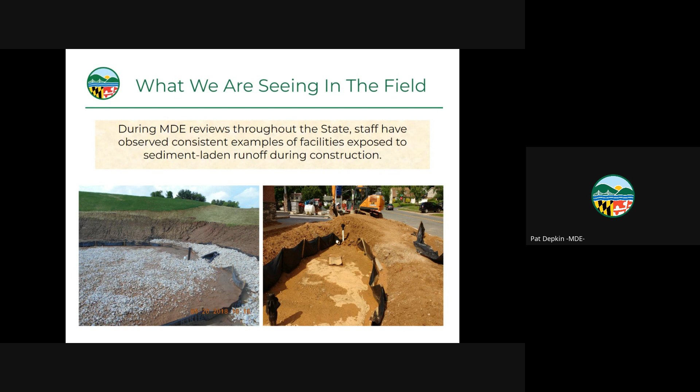So the stormwater manual specifically is pretty clear that when these facilities are installed and the surrounding drainage areas are not 100% stabilized, we need to divert the muddy runoff around them. Next slide. Got a couple more pictures here.

Again, in this case, we don't have silt fence around the perimeter of the BMPs, but we do have filter cloth laying on top. In this case, all the filter media and the underdrains have been installed. It's in there. And yes, granted, there is seed and straw down on the drainage area, but it's not stabilized. One good thunderstorm and these things are going to be inundated. And you can even see in the example closest to us, the filter cloth has all kinds of dirt and soil and whatnot on top of it.

And again, the fines, the clays and the silts that migrate through that filter cloth is going to compromise our facility and potentially compromise the underlying soils that may or may not have an infiltration component or a recharge component.

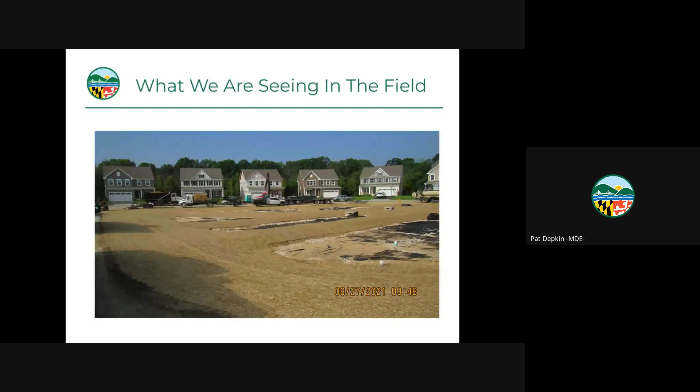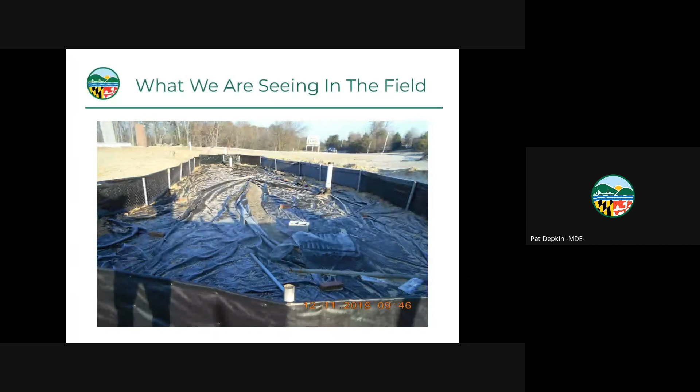I think we got one more example here. Yep. Now this one, they've done it twice. They've put silt fence around the perimeter and they've laid filter cloth on top. But again, this doesn't meet the intent of the regulation, and it is allowing fine particulates to get in here, and it's going to shorten the service life of this facility if it functions properly at all from the get-go. Next slide, please.

Okay, we've got a little discussion point here, and if we've got any questions to entertain, let's have it, Devin. Yeah, thank you, Pat. It looks like we do have one question here. Brian Hopkins submitted a question in the Q&A. His question is, could submerged gravel wetlands also be considered a filter? It seems like it would be prudent to not let the voids get clogged by sediment. Otherwise, the pollutant-laden water won't be able to trickle down through the biomass-coated media, but will instead bypass through the spillway. That's exactly what we're talking about here.

And absolutely, that's correct. The submerged gravel wetland is acting as a filter in addition to the biological component that's going on. And we're going to talk about submerged gravel wetlands a little bit further on in the presentation, because, based on what we're seeing, there may not be a fully clear understanding of how submerged gravel wetlands work, and when they need protection and when they do not. And again, we'll speak to that a little further. But the point is valid. If you clog up all that expensive media with muddy runoff from the site, then the facility's not going to operate properly.

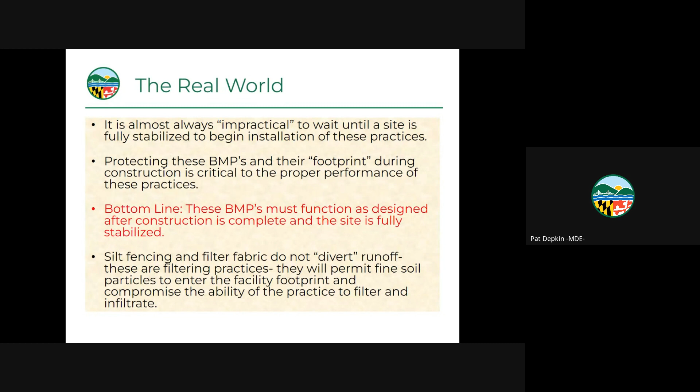There should be an overlay plan that identifies where all these facilities are, beyond just simply having them on the drawing and identified as a bioretention or a micro bioretention or an SGW or whatever the particular facility is. What I'm envisioning based on this text is probably something that highlights these, even if they're highlighted in some different color.

Again, this doesn't have to be an extremely detailed plan. It could be on the stormwater plan. It could be on the grading plan. It could be on the sediment erosion control plan. Wherever it is, there should be a plan sheet, or as many as needed, hopefully not that many, that shows where these facilities are on any given site.

And that makes it clear to everybody involved, from the contractor to the inspectors to whomever, where these facilities are and where we need to be advised that protection is required. Next slide, please.

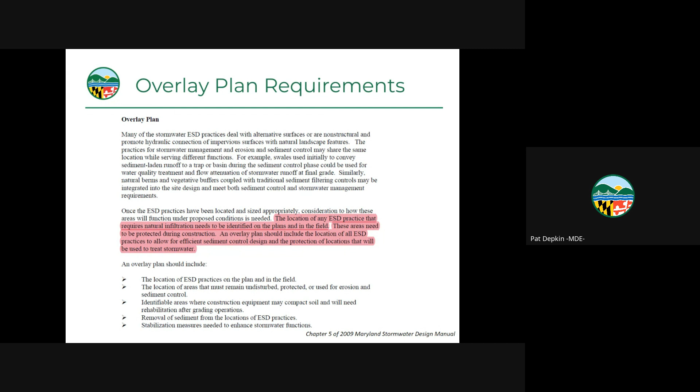Now, we've talked about protecting excavated facilities. Let me back up just a little bit. Any facility, again, if it has an infiltration or a recharge component, we're depending on the native soils to absorb any runoff that we direct into these facilities, or some portion of it.

Okay. Now, in the course of building a housing development or building a big box or what have you, there's construction traffic. It might be pans, scrapers, end dumps, dump trucks. Who can say what's going to be running around on these jobs, and who can say where they're going to be running? Well, let's say you've got a series of dry wells or microbioretentions behind the backyard lot of a row of homes. If you allow equipment to run on that area, it's going to compact those soils.

So when the time comes to put these practices in, the soils that are there do not reflect the conditions that allowed the designer to determine that these will in fact infiltrate. Once you've compacted that soil, it's not the same soil. It doesn't have the same characteristics that it had when the initial borings or test pits or infiltration tests were run in the field. So again, to protect them at this point is pretty simple.

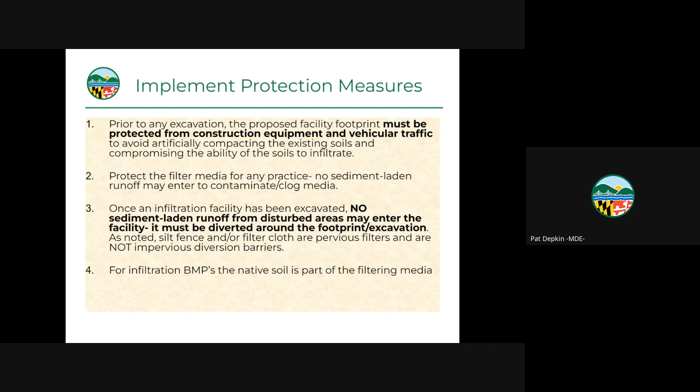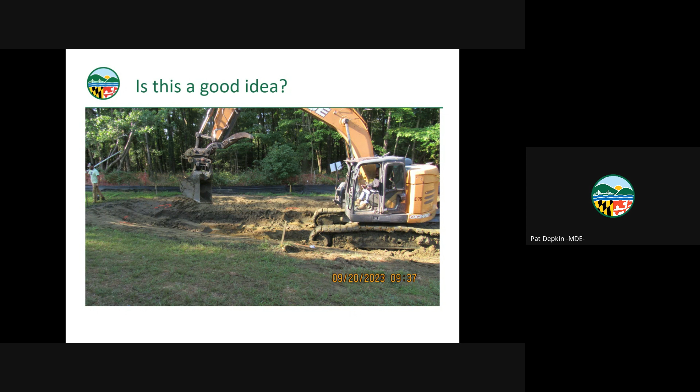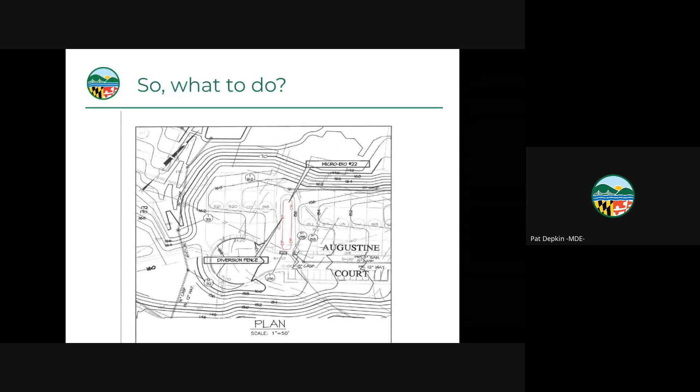But the point is, we need to make a better effort of identifying them so that folks know where they are and where they need to watch their step. Next slide, please.

So again, that just blows things up a little bit. Clearly identify these practices on the plans. If we don't know they're there, if the field people don't know they're there, they're not going to protect them. And if they don't recognize them, they're not going to protect them. I don't see this as a very heavy lift for the design community or the plan review community, but we can talk about that when we get to the discussion point. Next slide, please.

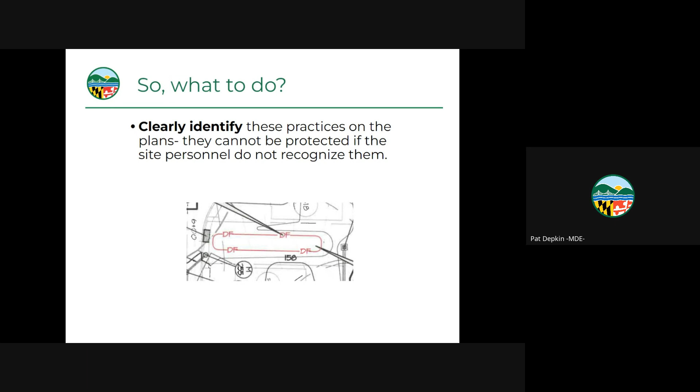So the question was brought up earlier. What can we do? What are the tools available to us? Well, the sky is practically the limit here. The MDE and the design manual do not specify how you need to protect these things. All we're saying is don't let muddy water get into them. So any impervious barrier will work.

The one that jumps to mind first and foremost is our detail in the sediment control manual, C9, diversion fence. Diversion fence is pretty clearly defined. There's a detail. It tells you how to put it in. It tells you what the materials are that it's composed of. And most people that install these controls should be familiar with it, because we often use it on the upslope or uphill side of the site to keep runoff from adjacent sites, clear water, from getting onto our disturbed site. But it'll serve the same purpose around these facilities.

Now, there's plenty of other ways to do it. The example that I like to bring up is when I was doing construction inspection full time, especially during the summer, you might have a water line or several water lines that you're bolting up in the middle of an intersection. You're bolting all the connections together. So you've got a fairly big excavation, and a fair amount of infrastructure in that excavation, and it may take a couple hours to bolt everything up. Well, here comes a thunderstorm.

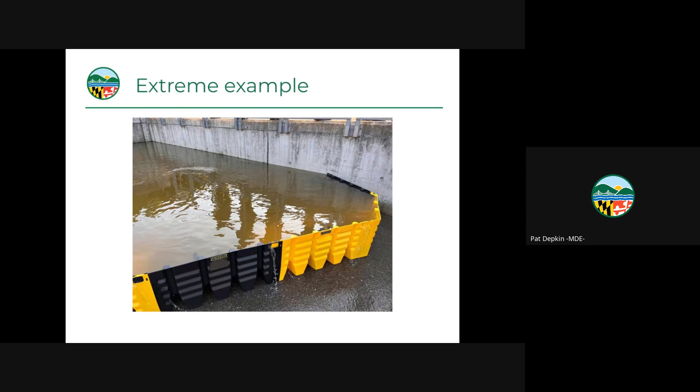And for folks whose job is to review plans all day, I'm sure at some point your eyes kind of glaze over. That's an interesting job to have, and I'm sure it gets repetitive. But the point being, we're trying to identify these things. We're trying to draw people's attention to them and let them know where the protection measures and practices need to be installed. Next slide, please.

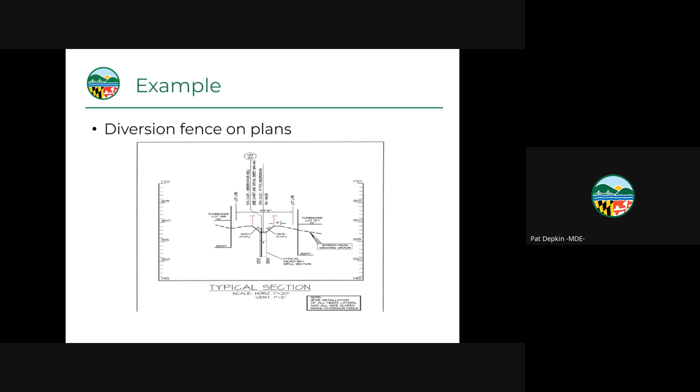Now, in this case, they're calling for them to be done after the road is boxed out and the base course and the curb and gutter are put in. And by off lot, again, we're talking about common facilities like the one between the two townhouse blocks. We're not necessarily talking about on lot. I'm sorry, I'm drawing a blank. Rain gardens or dry wells.

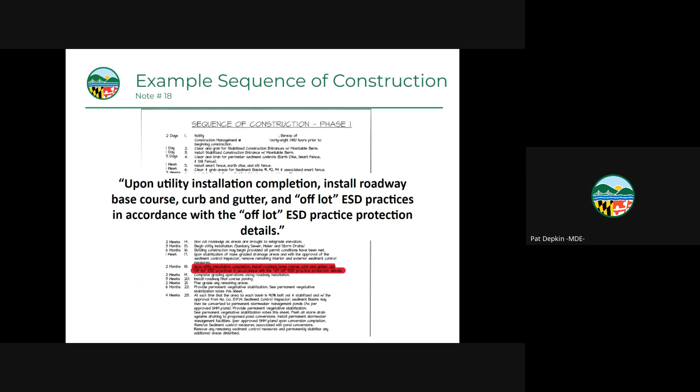So again, it would be helpful if the designers and the engineers could work this protection or address it in their sequencing. You know, we're not saying it has to happen, but it would make life easier for all parties involved. So something to consider. Next slide, please.

So what's the bottom line, right? This is it. Any facility with a proposed infiltration component has to be protected from both traffic and sediment-laden runoff from the beginning of the job. Okay, that's what we talk about, putting the orange safety fence around them so they don't get run over by, you know, track loaders and end dumps and pans and dump trucks and any other heavy equipment that might be running around.

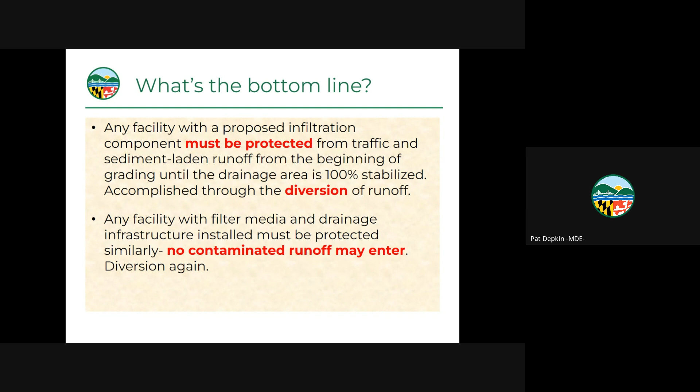Once the media goes in, same thing. No sediment-laden runoff can go in. It has to be diverted. And again, the point, it's real simple. We're driving this home. Divert, divert, divert, divert. Next slide, please.

All right. Looks like we got a point to open up for a little discussion here. So what do we got, Mr. Devon? We do. Thank you, Pat. It looks like we had a few questions from our department here at MDE, and then another one unrelated to those. But I'll go back with the oldest one.

Greg Kolaric from MDE asked, and he was referring to the excavator driving over the proposed bioretention facility, if this constitutes a violation of the approved plans. And it looks like Amanda Malcolm from MDE also gave a great response to that. Basically Amanda said, Greg, I don't think it's a violation unless the ESC notes say that heavy equipment is not allowed.

And then there's a little bit more of the conversation in there. But looks like Amanda answered that very well. But we do have two more questions here, Pat. One's from Tesfa Michael. He asks, is the MDE surface storage table applicable to design of submerged gravel wetlands?

Boy, I'm going to defer. I'm just a soils technician. I'm going to defer that to one of our engineers who is more familiar with that portion of the design. That's not really my area of expertise, but it sounds like a very valid question.

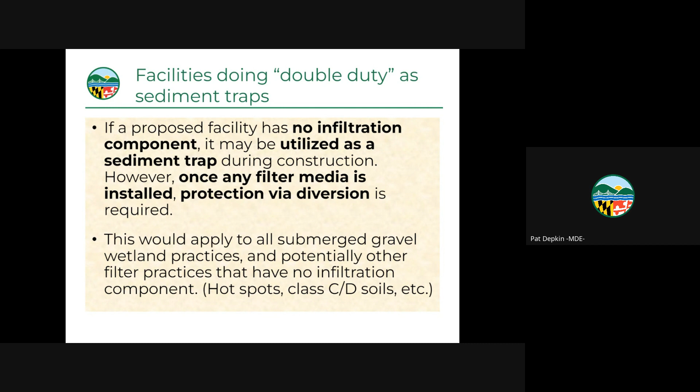At the end, when you're ready to convert it, you do it just like you would the old school large detention basins that did double duty as a trap. You restore it to its original contours and design, install the media and other infrastructure. At that point, again, if the surrounding area is not stable or there's a potential for muddy runoff to get into it, you got to put up your diversion. Okay. Hopefully that's clear. And again, we can discuss that more at the end when we get into our round robin discussion. Next slide, please.

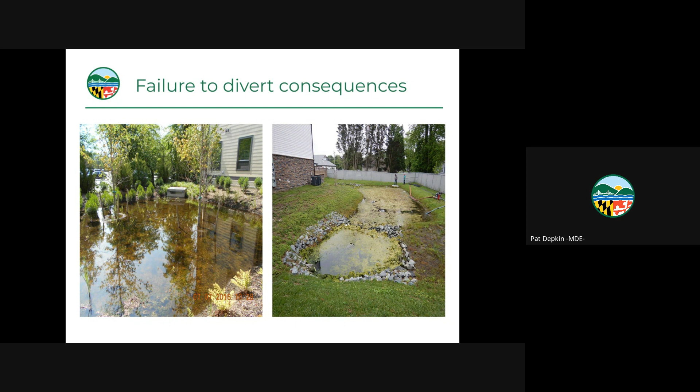Again, I spent a lot of time in the field specifically running in-place infiltration tests to tell my engineer bosses whether or not their design was going to work in a particular location. So again, I can't speak for how other firms operate. I can't speak for what the industry default practice is, but I'm here to tell you, if you don't actually dig a hole where you're proposing to put an infiltration basin, you're rolling the dice. And I'll leave that at that. Next slide, please.

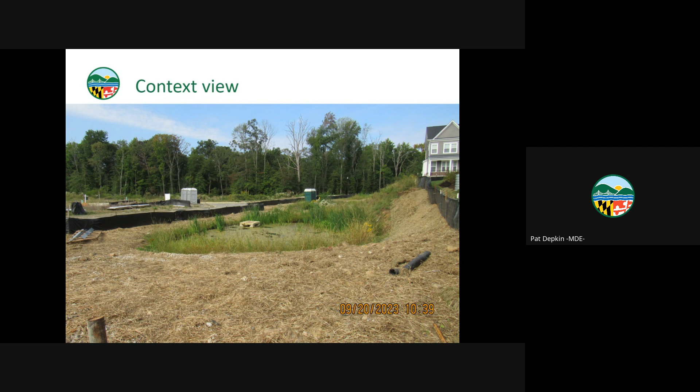It just doesn't make any sense to me why anyone would do things twice unless some extraordinary circumstance demanded it. Next slide, please. Okay, that brings us to the end. I want to address one more point before we get into the further Q&A.

On bioretention soil mix, we get a fair amount of questions in our office. People are asking us, I'm making bioretention soil mix. I'm a landscaper. I've got a mulch yard, et cetera. I sell sand and peat and topsoil, and I want to make bioretention soil mix, and I want to know how to get it certified. Well, there is no such thing.

There is a specification for bioretention soil mix. It's very specific in the design manual. It provides proportions for how much organic content it's supposed to have in it, how much sand it's supposed to have in it, what kind of sand, pH, soluble salts, a bunch of parameters. We don't receive samples of this stuff and evaluate it and provide certification, okay?

If you have contractors or suppliers that are looking to get a quote unquote certification or approval on their product, my suggestion is they should hire a third-party engineer, soils engineer, or whoever has the capability and the facilities to sample their product and evaluate it and determine if it meets the specification or not. If it does, the engineering firm writes a letter, the engineer puts his stamp and signature on it, and one will assume that for a period of time the materials coming out of that particular manufacturer or distributor are acceptable.